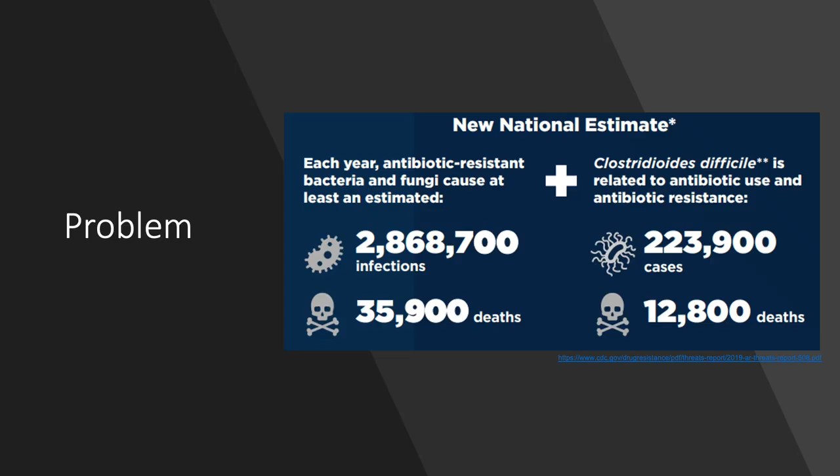2020 and 2021 are becoming pivotal years in modern history, and not just because of all the negative events, but because these years have brought to light a problem that has been occurring pre-COVID-19. Before the start of COVID in the US, more than 2.8 million people were afflicted with an antibiotic-resistant infection, not including prominent viruses such as HIV and influenza. Unfortunately, as a result, these infections had led to the deaths of 35,900.

In our FYDP group, we have a vision to significantly reduce disease transmission by designing an accessible and economical device for the general public. Although masks and a frequent hand wash habit can effectively reduce the risk of infection, common surfaces can be a major cause of disease transmission.

According to Public Health Ontario and many other publications, bacteria and viruses can remain on the surface for more than 2 hours and can even stay for days depending on the surface and environment conditions. Because of this, we want to target reducing transmissions through surfaces, specifically targeting objects in public areas that are meant to be shared with numerous people.

The current solution is disinfection by manual labor, which somewhat defeats the purpose of the action. Plus, the effectiveness of the disinfection is not controlled nor measured. Some autonomous solutions cost over $100,000, which are often bought solely by medical institutions that have the budget to stomach that cost. We aim for our device to fill the gap in that market by designing an autonomous and affordable solution to disinfect surfaces.

First constraint, we have that the robot must be able to disinfect at least one table of 1.2 by 0.7 meters in one charge. Although exact measurements were not taken, the robot could run multiple times around the table with all sensors fully functional during testing. With that in mind, it is reasonable to assume that the robot will be able to disinfect the whole surface of a 1.2 by 0.7 meter table in one charge.

On to the second constraint, we have that the robot must be able to operate safely on the tabletop without knocking off objects. This criteria was met using the frontal collision sensors and the TOF distance sensors. The TOFs were able to detect low-profile objects such as forks and knives, as well as more high-profile objects such as bottles and apples. So a choreographed action is initiated by the robot when it detects an object within a certain threshold, rotating itself until the object is no longer seen. Additionally, in the case that the TOFs malfunction, the frontal collision sensors are activated through touch.

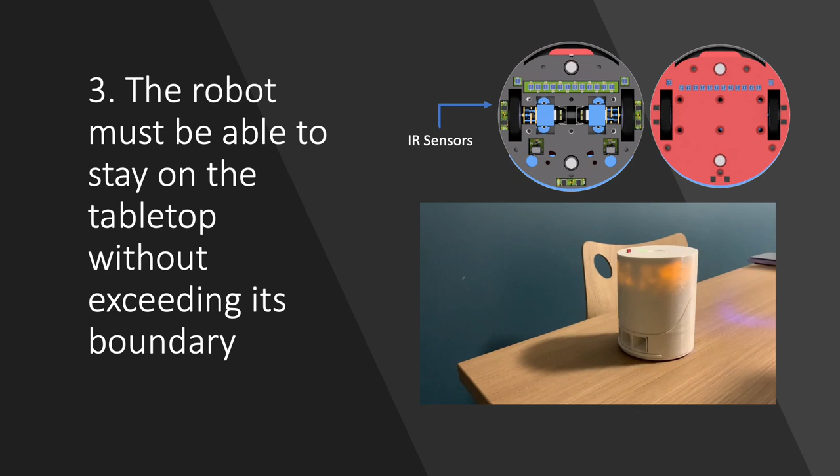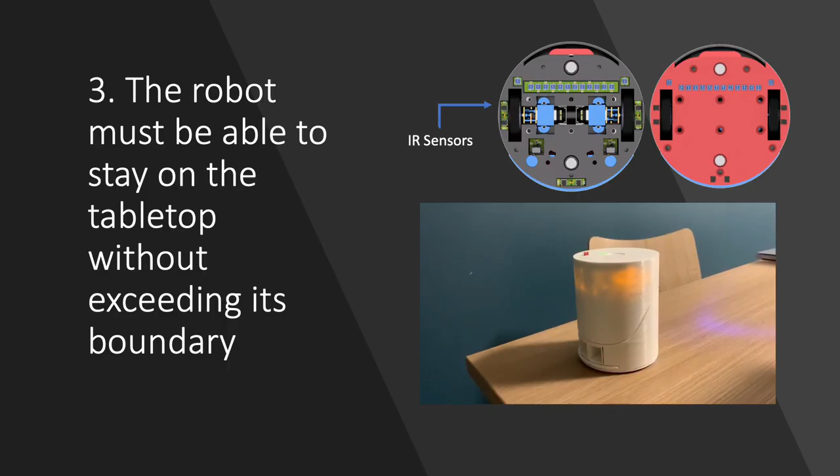So the third constraint is that the robot must be able to stay on top of the tabletop without exceeding its boundary. This criteria was met using the bottom-facing IR sensors that are triggered when the sensors detect the edge of the table. Similarly to when an object is detected using the TOF sensors, the robot initiates a predefined set of motion that backs off from the edge and starts moving at a different angle until the edge is no longer seen. And this allows the robot to successfully maneuver around the table without falling off the edge, covering more of the tabletop surface.

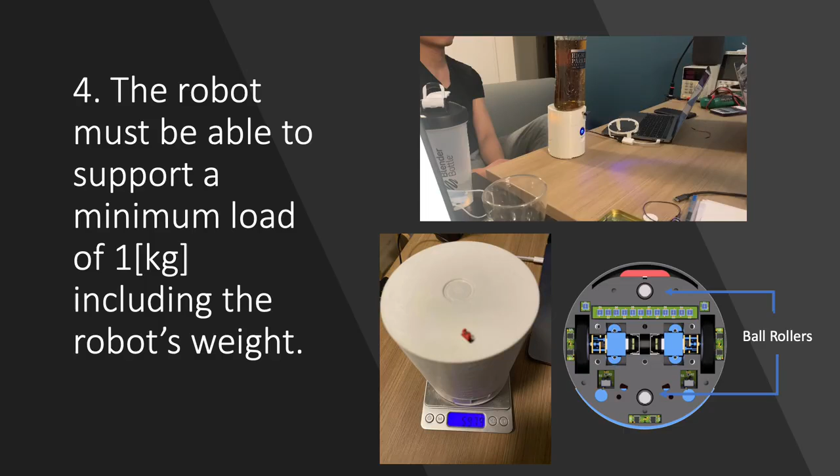Constraint 4. The robot must be able to support a minimum load of 1 kilogram, including the robot's weight. This constraint was put in place so that this robot could also be used in other applications where it was necessary to use the robot surface as a holder for objects, such as utensils in a restaurant setting. Since it was decided that the robot will be using two-wheel drive, additional support is needed to keep it balanced. 2 ball rollers were implemented so that there are now 4 points of contact with the ground, allowing for additional support. The robot weighs about 600 grams and can support an additional load about equal to its weight.

Constraint 5. The cost of production must be cheap enough to be considered as a viable product for restaurants, libraries, and other public spaces, ideally costing less than $300 Canadian. Unfortunately, we were not able to meet the intended cost of $300. The main reason is that the electrical components ended up costing a lot more than expected. In particular, we had decided to over-engineer and choose the most powerful compact UV LEDs available to us just in case. Each LED cost around $10, and the robot contains 12 of them.

Since we did not know how intense we needed the LEDs to be to achieve the disinfection needed, we used the best LEDs to be safe. Also keep in mind that since we only ordered the components in small batches, the unit prices for most of the components are not optimized, and some items can cost as little as pennies if we ordered in larger amounts. The use of off-the-shelf components such as the MCU and cables were also very expensive, which can be improved by designing our own MCU circuitry and FPC cables.

Constraint 6. The robot must pose minimum risk to nearby people, such as UV exposure. Mechanically, the layout of the UV lights is designed to minimize UV leakage through the table reflections. The robot is elevated within 3 mm from table surfaces to increase the intensity of focused sanitization. We have a supervisor node and firmware to ensure the safe operation of the robot.

As you can see, the UV is turned off whenever the robot is lifted or at the edge. This is done by checking the status of the IR sensors at the bottom of the chassis, or the IMU orientation readings. When these conditions are met, the robot goes into an emergency stop state that powers the UV off in hardware by toggling a pin connected to the circuit, which disables its operation. In addition, we have an emergency power shut-off button that kills the power to the entire robot.

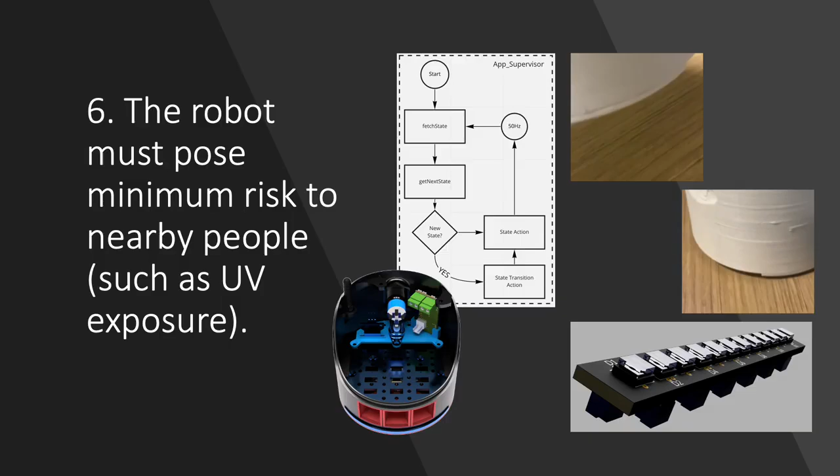Constraint 7. The robot must be able to sanitize up to 99% of common bacteria and viruses. In 4A, our group was in contact with chemical engineering professors Professor O'Coin and Professor Anderson about perhaps collaborating on verifying our UV LED implementation. They helped us gather white papers to get a grasp of what UV LED specifications we needed to achieve the 99% effectiveness. With this information, we designed the UV circuit accordingly.

Unfortunately, due to lockdowns and the pandemic, we were unable to verify our configuration in their labs. Instead, we decided to over-engineer and design for higher drive strength and made the UV drive specs controllable through firmware. This allowed us to be flexible in the off chance we were allowed to properly test the UV effectiveness. Again, sadly, this was not the case, and this constraint was never fully verified.

Criteria 1. The robot must be small enough such that it does not occupy the tabletop space, ideally a palm size within 1,000 cm3. In order to achieve a super compact robot in a low-profile format, everything has to be designed from the ground up. In mechanical design, everything is designed with the unibody mechanical design with 3D printing technology. So everything is efficiently printed and designed.

Electrical-wise, all custom PCBs were carefully designed and laid out with 90% space utilization, so they can fit in the tiny spaces compactly, as you can see in the image. As a result, the robot is 100 mm in diameter, 127 mm in height, so about 997.46 cm3, so it is within the spec of 1,000 cm3.

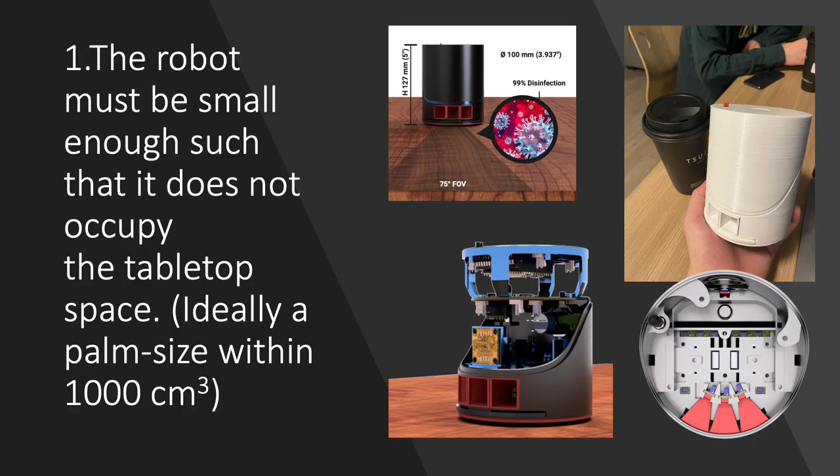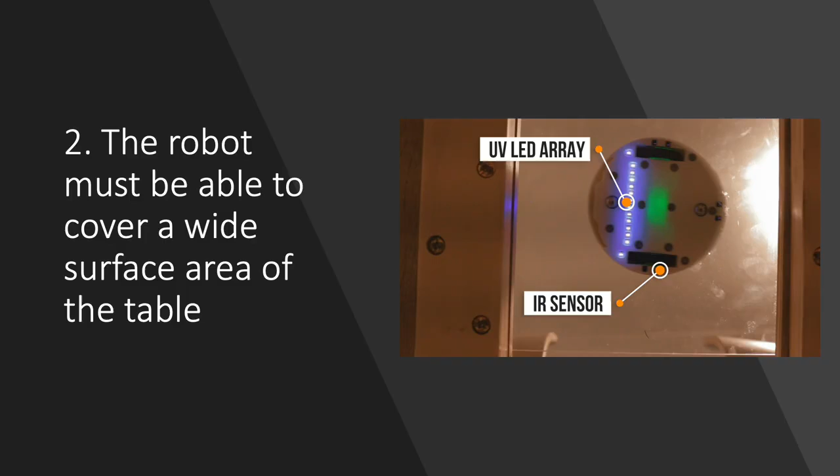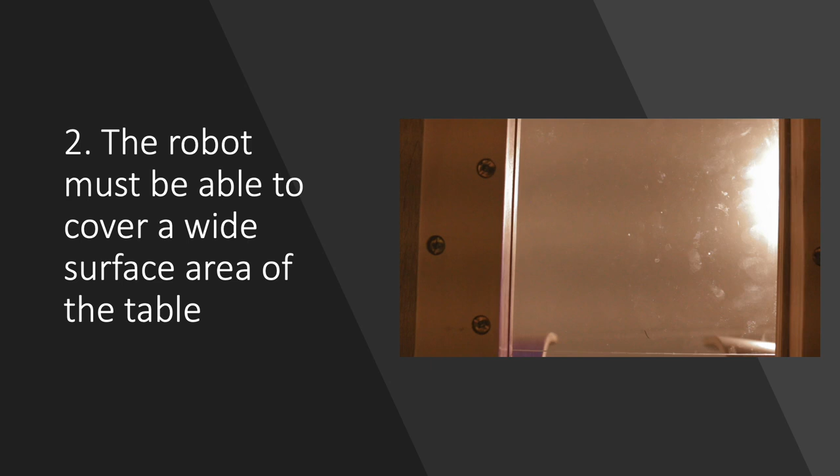For criteria 2, the robot must be able to cover a wide area of the tabletop surface. As you may see in the clip, there are 14 UV LEDs, and it covers 90% of the area traversed. The LED is elevated 3 mm above the ground so that it can ensure the performance needed for a 99% disinfection rate at the robot speed of 3 cm/second.

The third criteria is that the robot must be adaptable for it to be used in various environments. Although the robot is designed for tables, we have tested it on various surfaces such as the kitchen, floor, and the sofa, and the robot performed well. This is shown in the video on the right, where we have conducted tests on different surfaces and we can see that the robot is moving and performing as intended.

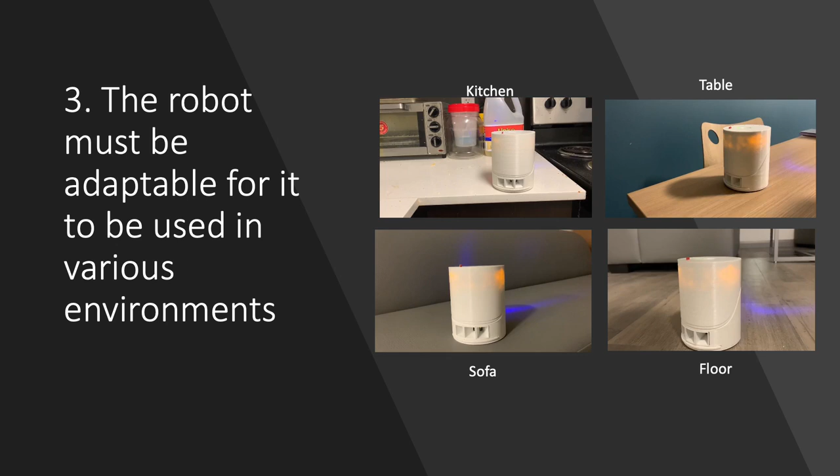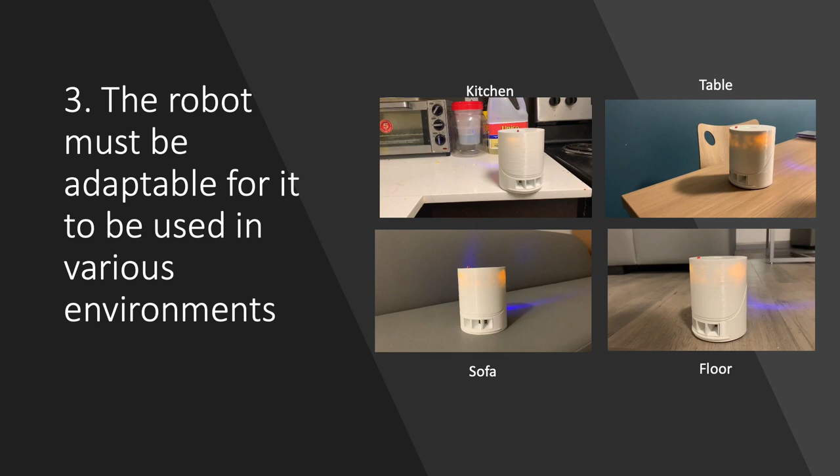We originally intended to test on tables in different environments, such as the library and restaurants for different applications, but unfortunately, due to the pandemic, we could not perform these tests at those locations. However, as the robot is performing well on the tabletop, we expect the robot to perform in different environments as well.

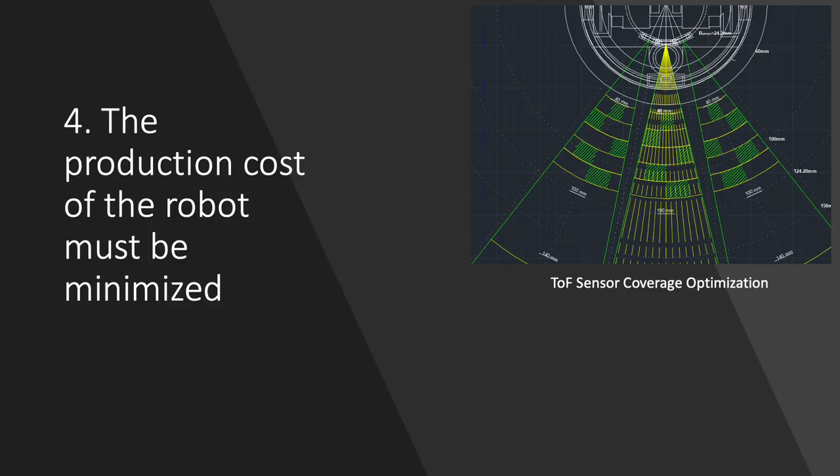The fourth criteria is that the production cost of the robot must be minimized. Although the overall cost constraint was not met, the team performed design optimization to reduce the cost as much as possible. This is done by limiting the usage of off-the-shelf components, designing components from scratch as much as possible. For example, all of the PCB boards designed were kept under 2-layer boards, which reduced the PCB cost by a factor of 10. Additionally, the team limited the number of sensors on the robot by performing optimization on sensor placements to minimize the number of sensors and thus reduce the cost.

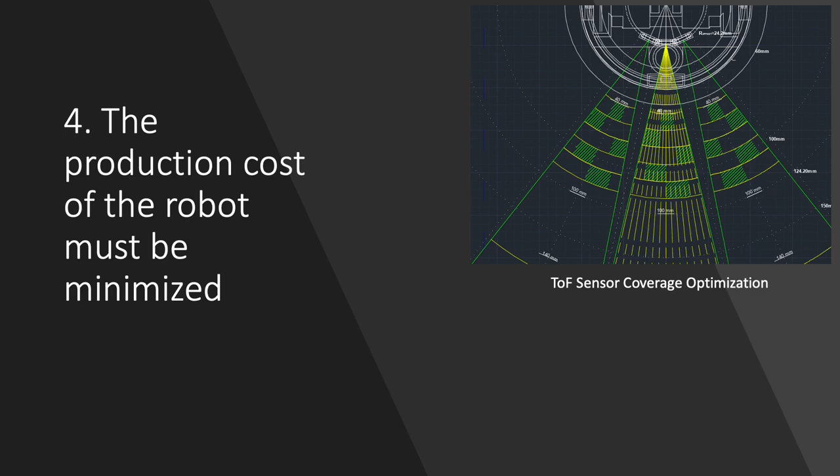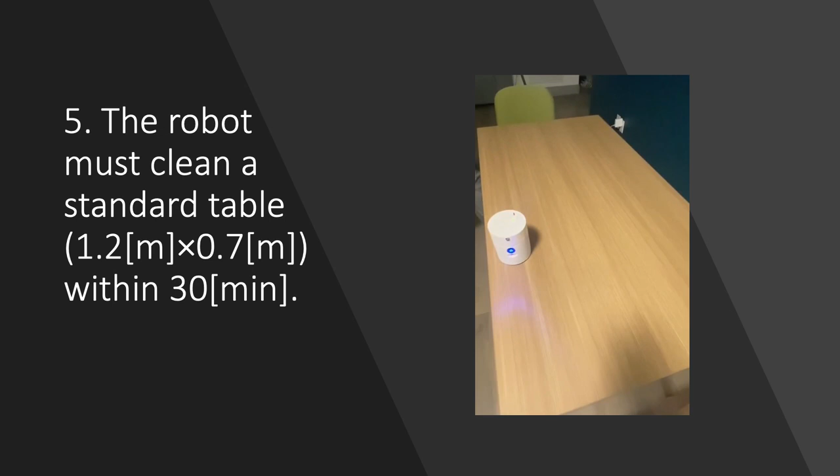The fifth criteria is that the robot must clean a standard table within 30 minutes. We define a standard table as our table for 4, in which the length is 1.2 meters and the width is 0.7 meters. We designed the robot based on a set of equations to find the parameters such that the robot is capable of cleaning the table within 5 minutes with 90% effectiveness on average viruses.

As we can see from the video, it only takes 30 seconds for the robot to clean from one end to another, in which the distance is 1.2 meters. Since the robot diameter and the UV LED coverage is 10 cm, for the robot to clean the table with 0.7 meter width, it needs to run 7 times, which only takes about 3.5 minutes, and therefore is much smaller than the defined 30 minutes.

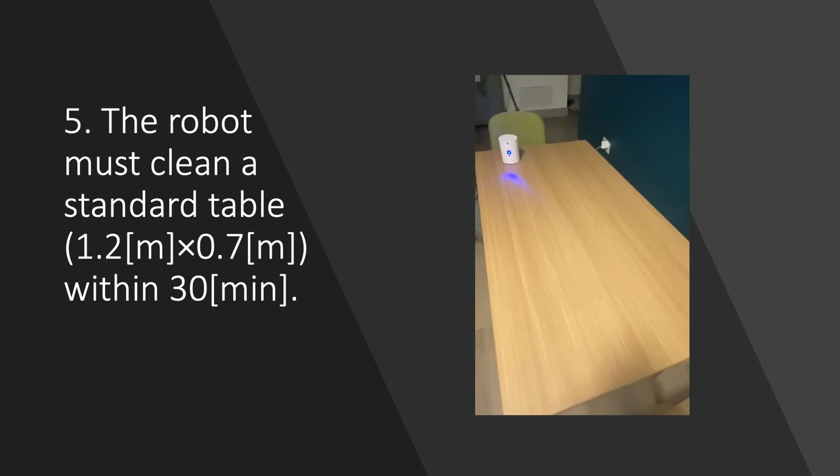That is the end of our final demo video.